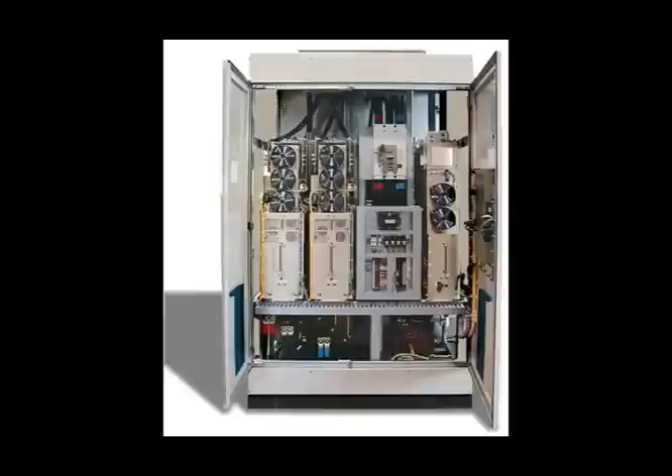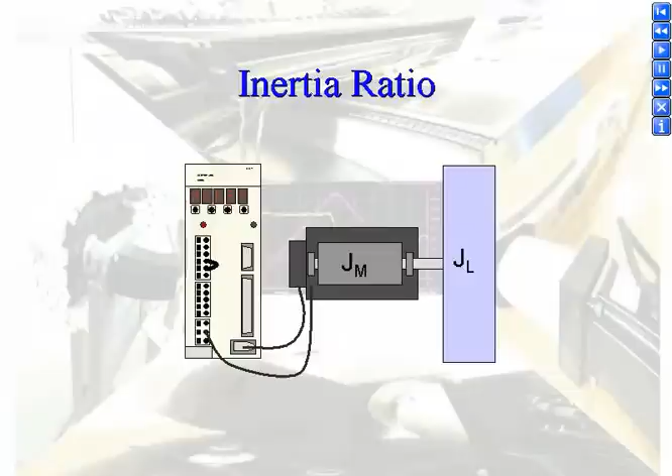The Sigma 2 SGDH amplifier uses an advanced tuning algorithm that allows the motor to be controlled with unrivaled performance. Internal to the Sigma 2 is a mathematical model of the actual machine based on the machine's mechanical inertia ratio. The inertia ratio is set by the parameter PN103 as a ratio of the load inertia to motor inertia expressed

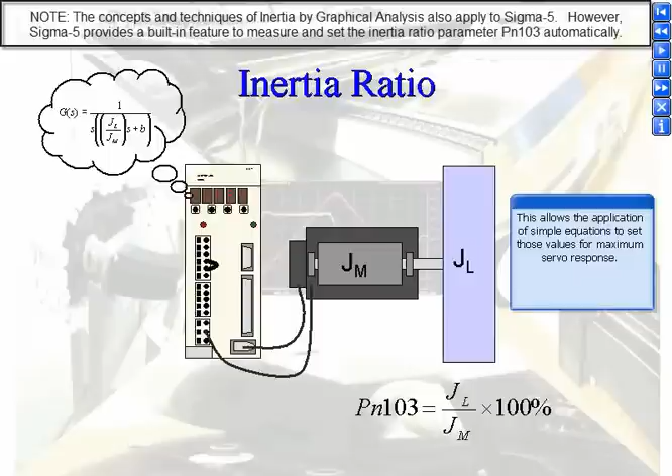as a percentage. PN103, when set correctly, will properly scale the speed and position loop gains, giving those tuning parameter settings meaningful values and units. This allows the application of simple equations to set those values for maximum servo response. When high performance is required, PN103 must be set correctly. But the question is how to find out what the inertia ratio is.

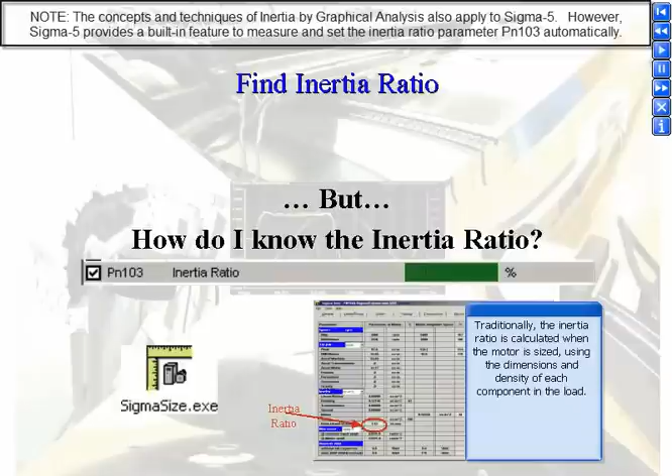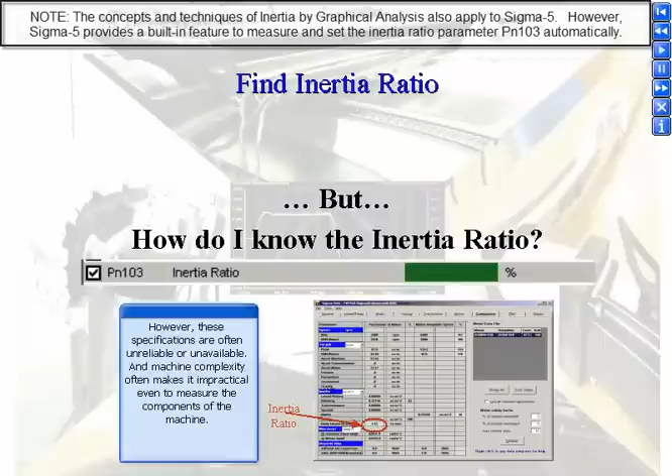Traditionally, the inertia ratio is calculated when the motor is sized, using the dimensions and density of each component in the load. However, these specifications are often unreliable or unavailable, and machine complexity often makes it impractical even to measure the components of the machine. The amplifier's online auto-tuning algorithm attempts to estimate the inertia ratio as well, but external factors often limit its accuracy.

This e-learning module introduces a simple technique that allows the inertia ratio to be calculated using a spreadsheet by measuring a graph of the machine in motion. This is called finding the inertia ratio by graphical analysis. The spreadsheet that Yaskawa has developed for graphical analysis is called Inertia by Graphical Analysis.

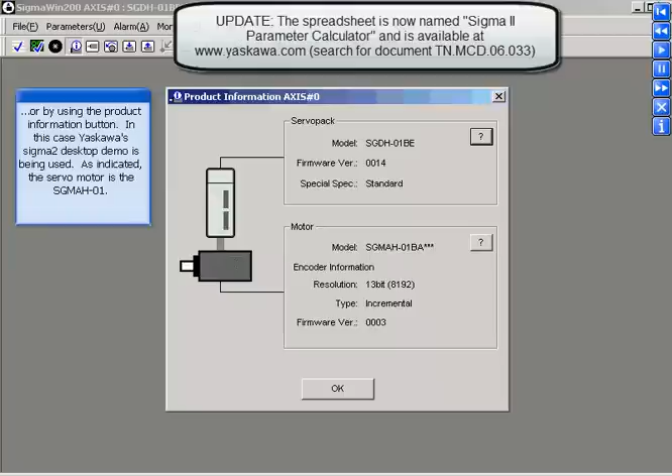This information can be found on the motor nameplate or within SigmaWin 100 when you connect, or by using the product information button. In this case, Yaskawa's Sigma 2 desktop demo is being used. As indicated, the servo motor is the SGMAH-01. Once the motor type is known, its rated torque in Newton meters and rotor inertia in kilogram meters squared must be entered.

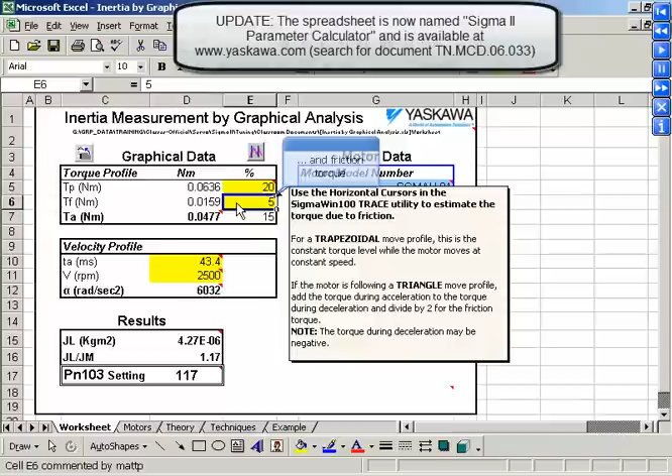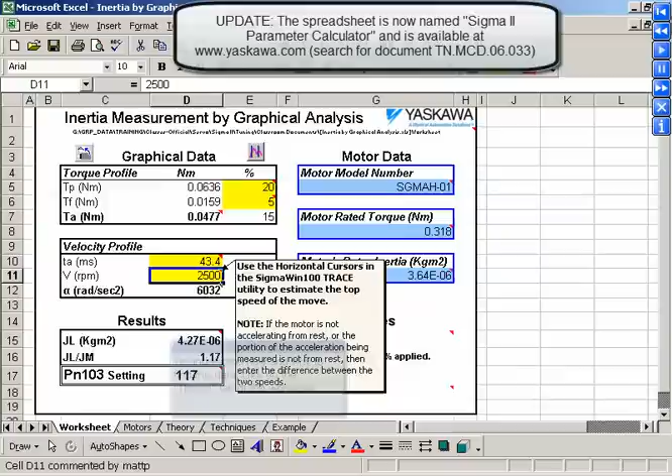With the motor data entered, the remaining 4 items highlighted yellow remain to be entered from graphical data. The peak torque and friction torque produce acceleration torque. The acceleration time and change in speed produce an acceleration rate. To understand how and why to find this data, click on the Theory tab of the workbook.

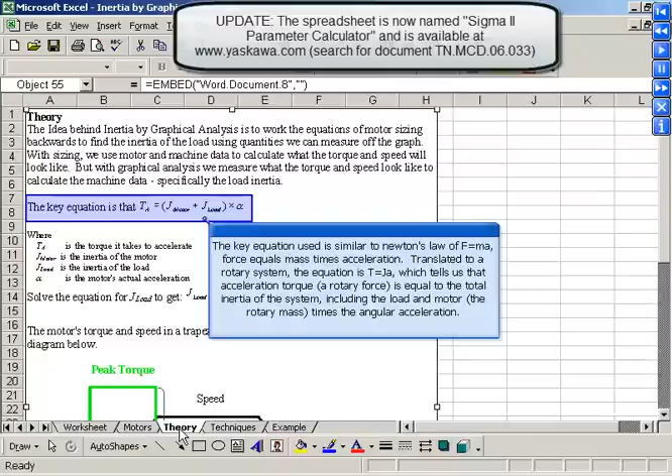load inertia. The key equation used is similar to Newton's law of F = ma, force equals mass times acceleration. Translated to a rotary system, the equation is T = Jα, which tells us that acceleration torque, a rotary force, is equal to the total inertia of the system, including the load and motor, the rotary mass, times the angular acceleration. The equation can be solved for load inertia, which when compared to the motor inertia is the inertia

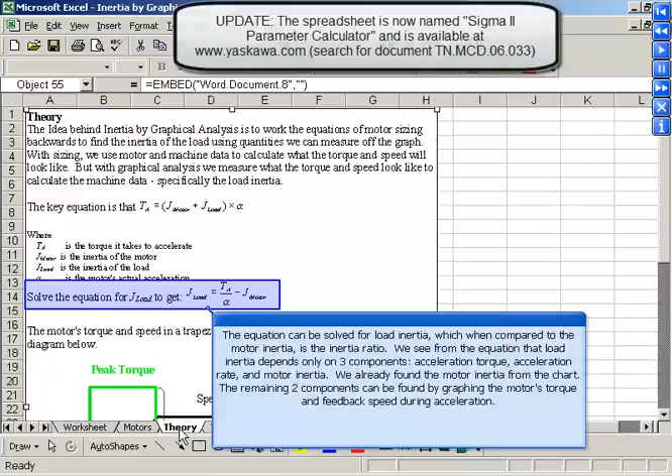ratio. We see from the equation that load inertia depends only on three components: acceleration torque, acceleration rate, and motor inertia. We already found the motor inertia from the chart. The remaining two components can be found by graphing the motor's torque and feedback speed during acceleration.

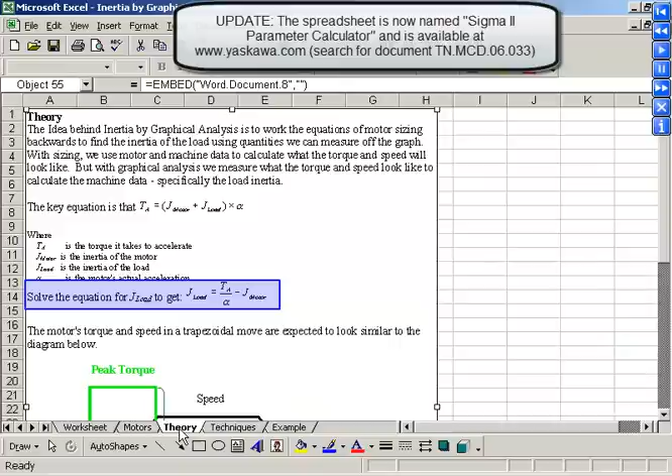The ideal graph of torque and feedback speed for a trapezoidal move is as shown. To find acceleration torque, the peak torque and friction torque are measured from the graph. The difference between the two is acceleration torque, one of the components in the equation above.

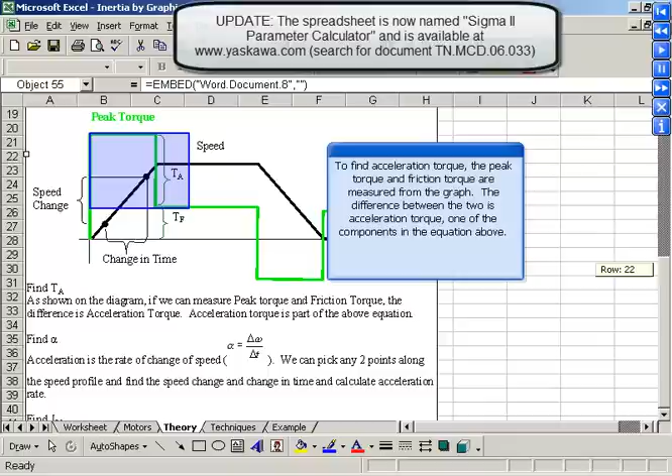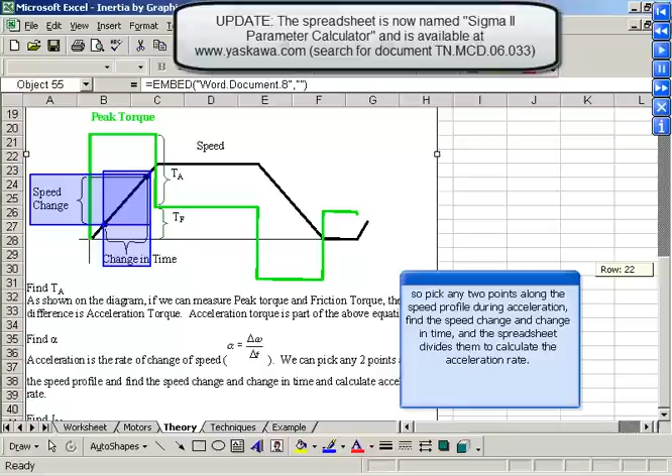To find the acceleration rate, remember that acceleration is just how fast the speed is changing. Change in speed divided by change in time. So pick any 2 points along the speed profile during acceleration, find the speed change and change in time, and the spreadsheet divides them to calculate the acceleration rate. This graphical data, along with the motor data, is all that is needed to solve the equation for load inertia.

The next step is to use the SigmaWin 100 trace feature to take a suitable graph of the machine in motion. Click on the trace icon to open up the graphing tool. Click the Setup button to configure trace data. Using the menu items on the left, the graph data can be chosen. It is extremely important that the graph be of torque reference and feedback speed.

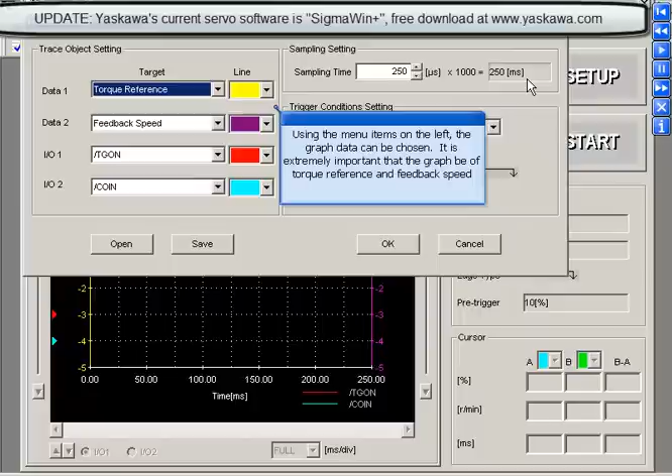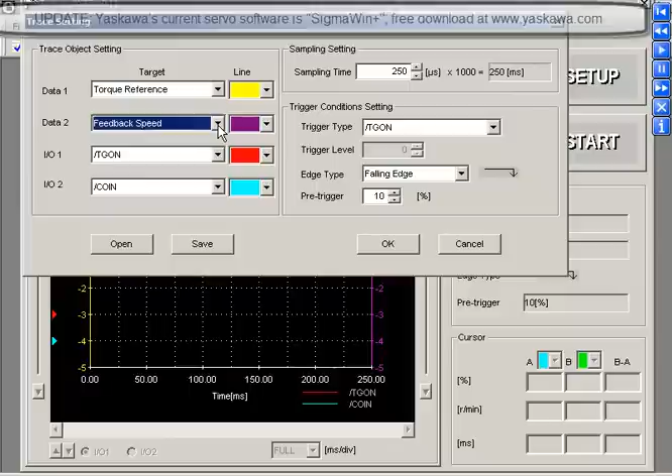Torque reference graphs how much torque the motor produces. Feedback speed graphs how fast the motor actually went. Do not choose speed reference or reference pulse speed, since those are commands rather than the actual movement of the motor. Click the Start button to take the graph.

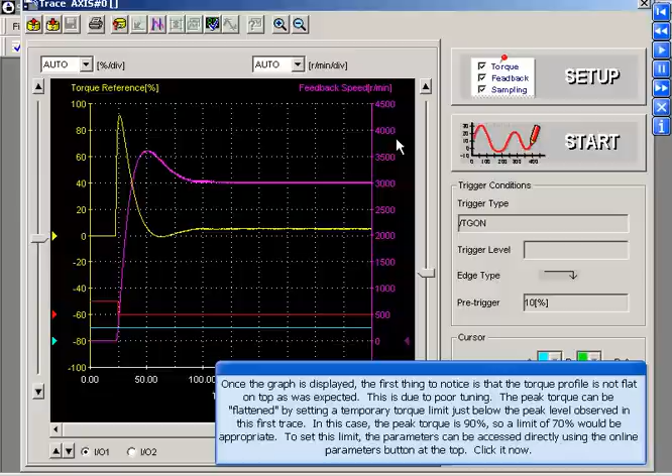Once the graph is displayed, the first thing to notice is that the torque profile is not flat on top as was expected. This is due to poor tuning. The peak torque can be flattened by setting a temporary torque limit just below the peak level observed in this first trace. In this case, the peak torque is 90%, so a limit of 70% would be appropriate. To set this limit, the parameters can be accessed directly using the Online Parameters button at the top. Now the machine's movement can be graphed again with this torque limit in effect.

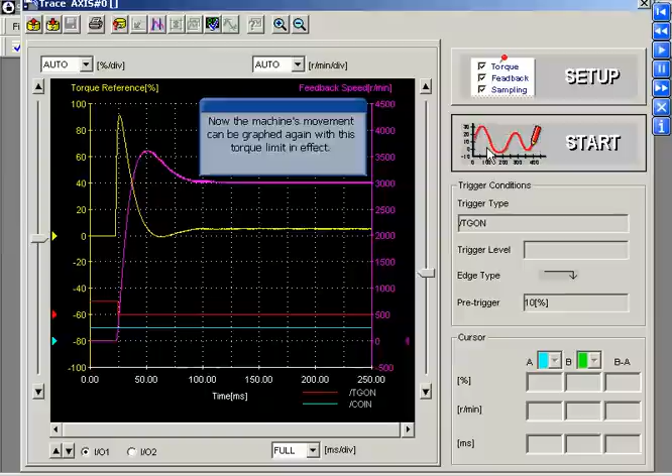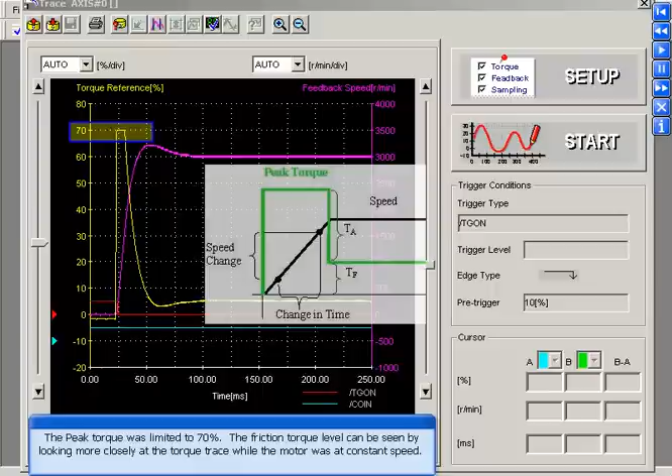This trace now looks a lot like the ideal one under the Theory tab, and in fact it contains all the information necessary to complete the data in the worksheet. The peak torque was limited to 70%. The friction torque level can be seen by looking more closely at the torque trace while the motor was at constant speed. Adjusting the scaling to 1% per division reveals that the torque during the constant speed part of the move is steady around 5%.

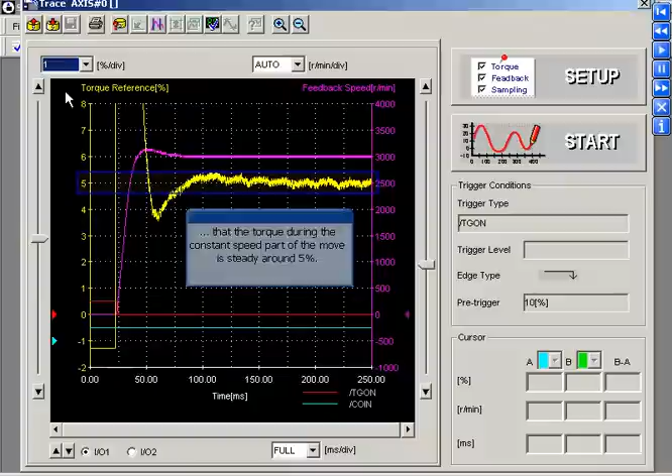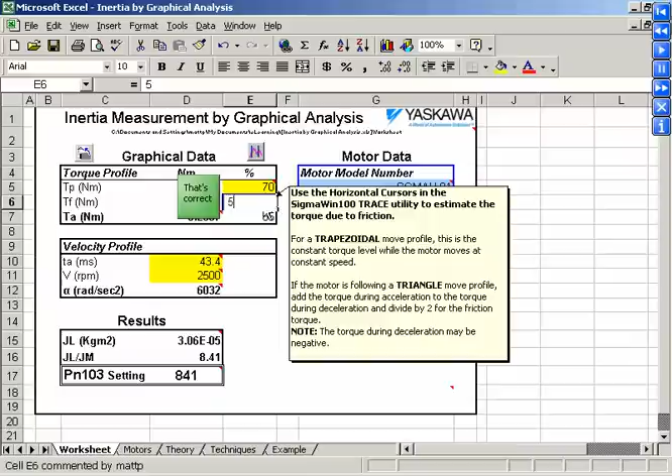The data for peak and friction torque can now be entered into the worksheet. First, enter the peak torque. Now enter the friction torque. All that is left to find is a change in speed and a change in time. Let's go back to SigmaWin 100. The graph should be adjusted to look more closely at the acceleration only.

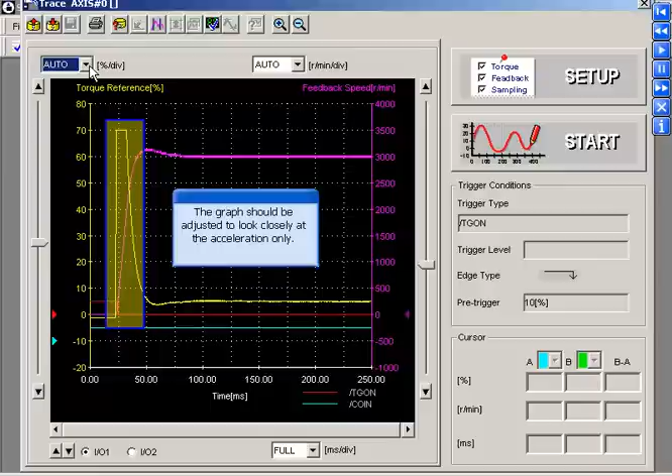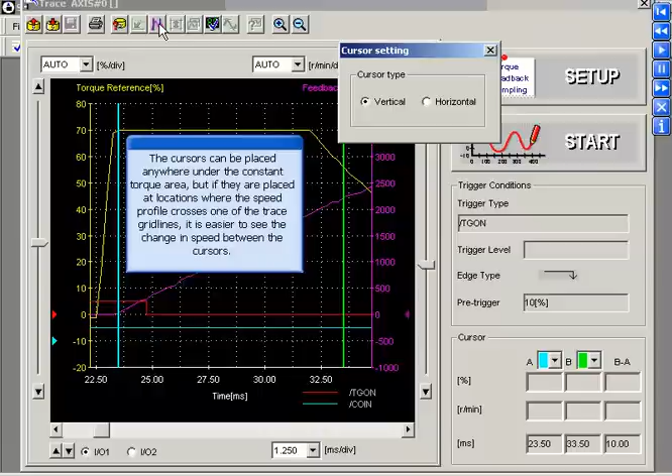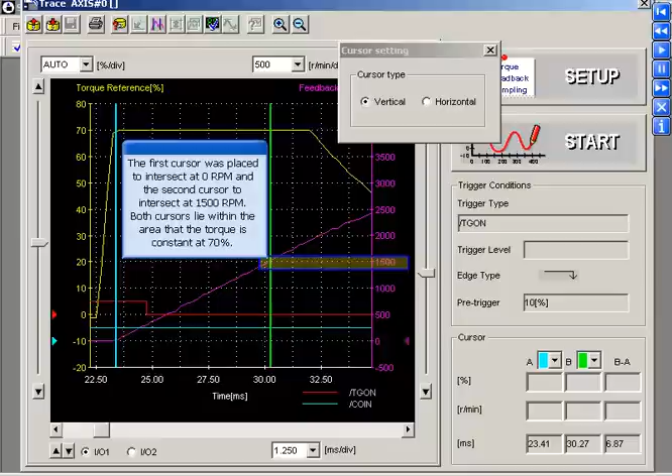Use the cursors to accurately measure the graph. The cursors can be placed anywhere under the constant torque area, but if they are placed at locations where the speed profile crosses one of the trace grid lines, it is easier to see the change in speed between the cursors. The first cursor was placed to intersect at 0 RPMs and the second cursor to intersect at 1500 RPMs. Both cursors lie within the area that the torque is constant at 70%. The cursor data shows us that the time it took for this acceleration is 6.87 milliseconds.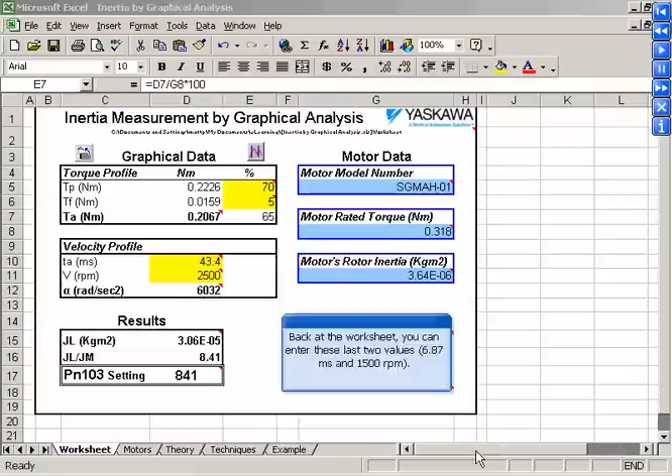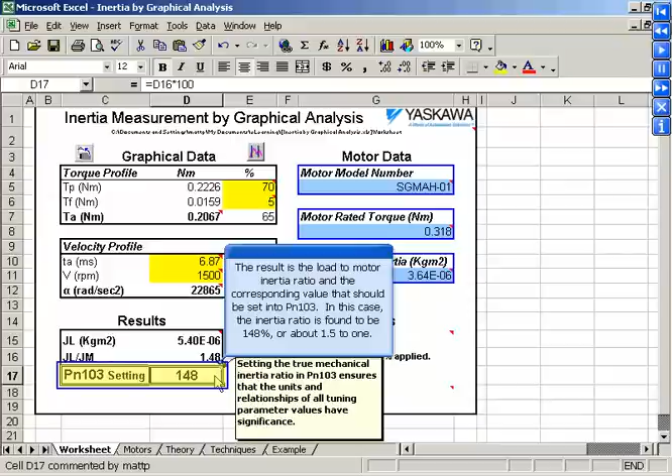Back at the worksheet, you can enter these last two values, 6.87 milliseconds and 1500 RPM. The result is the load to motor inertia ratio and the corresponding value that should be set into PN103. In this case, the inertia ratio is found to be 148%, or about 1.5 to 1.

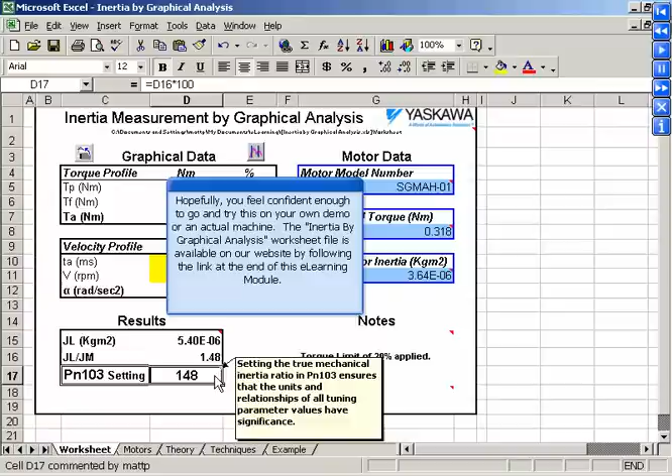Hopefully you feel confident enough now to go and try this on your own demo or an actual machine. Finding a machine's inertia ratio by graphical analysis has proven to be very repeatable and accurate to within about 10%. For techniques to find even more accurate results, please refer to the Techniques tab of the worksheet.